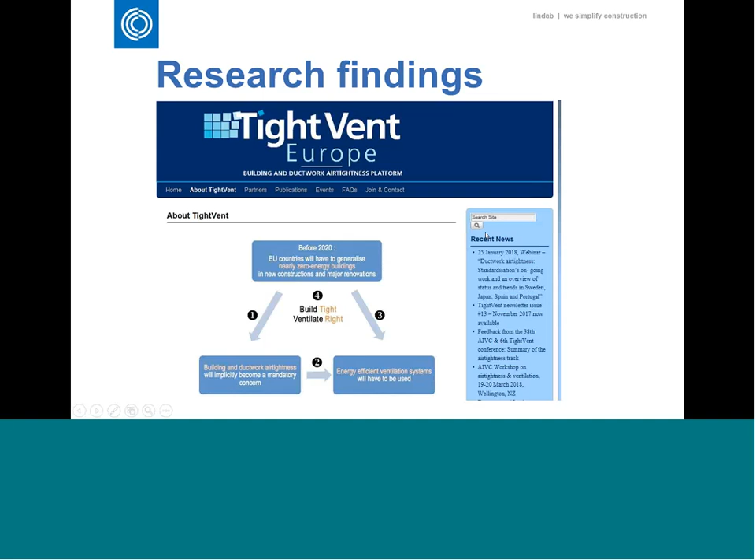Then how to ventilate right, that's a little bit more tricky, but if we go to the next part here, I am always talking about this part with a very airtight building,

and then mechanical supply and exhaust ventilation with heat recovery, so that we take in the best air available in the building, we use it, we heat it up, and then we use the energy again to heat up the new air coming in. Then we have a very good and healthy building that will work as we say it will.

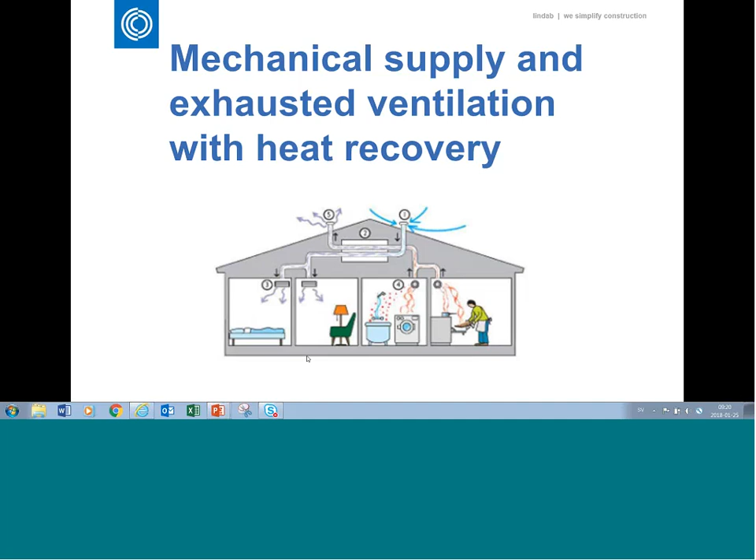So, Lars-Åke, we couldn't hear you. No, okay, I didn't say anything. Yeah, it didn't work for a while, but now it works again.

Okay, so airtightness in ventilation ducts, what is that? It starts off with this little diagram here that we have, and it's one of the crucial things for airtightness in ducts. On this part we have the system pressure. It goes from 10 Pascal to 10,000 Pascal.

It's perhaps not really relevant, but the standards go up to 2,000 Pascals, and that's what we are using. Over time, the pressure has gone down and down to low pressure systems, because we save energy in that. So the pressures are going down all the time, but this diagram works all the time.

On this other side, we have the leakage factor, that is liters per second per square meter. And that is to be able to compare different systems, which is big or which is small. So therefore we have this square meter, and the square meters, that is the area, the surface area of the duct system.

And why do we measure that? Really, I don't know, but I think it has been from the beginning when the researchers started up with this in the 1960s. They tried to find a measurement that was easy to find and also had a good impact on this. So it worked with these straight lines here that are in this diagram, and it really does.

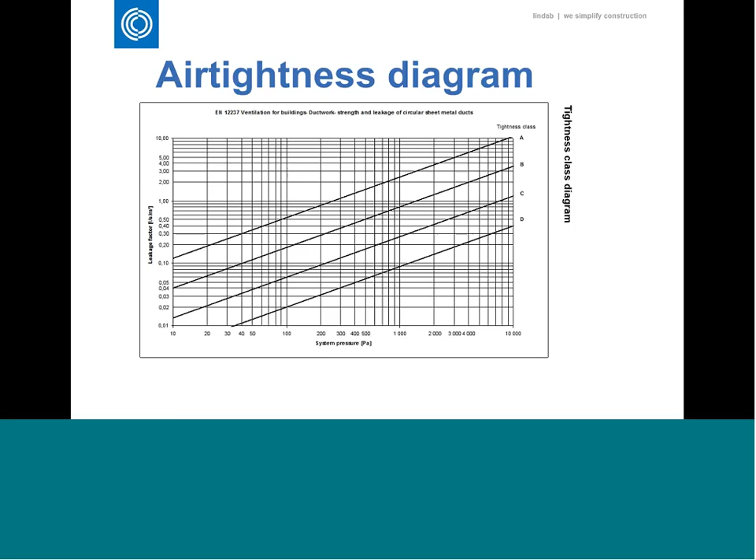To measure the surface area, there is one standard, EN 14239, surface area, that takes care of both rectangular and circular duct systems. It has been adapted so that it should be very easy to measure with a measuring tape or something like that. You measure the straight ends, going with that size to the center line of the next center, and then measure that.

You don't measure anything about the bends or around the T-pieces. But when we go to a reducer, we take the full length out to the reducer where it has changed to the next dimension, treating it as the same diameter as the other part. That is to be able to do the surface area measurement very easily.

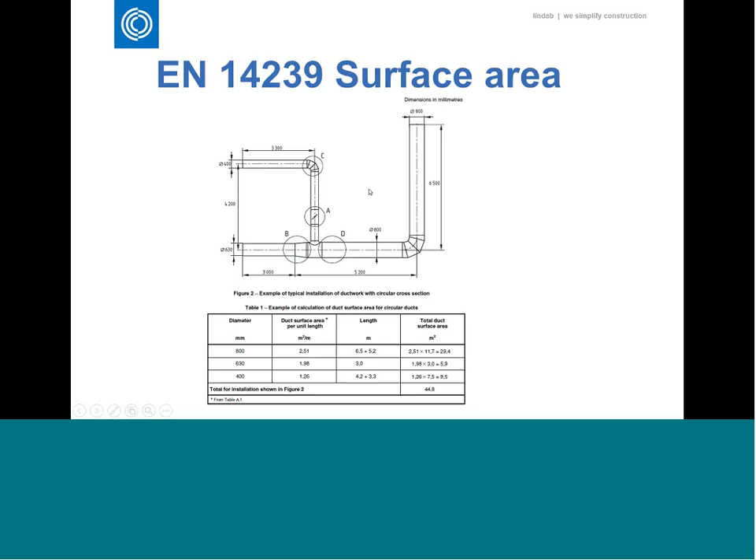How we do it in reality is we have some kind of fan. This is a very good one, a very easy one for everyone to use. You don't need to be a scientist to use this, because you put in what you want, what type of leakage class you want to achieve, and then you start blowing.

You say go up to 400 pascals - that is very common here in Sweden to test airtightness at. In other countries they test several pressures, or one pressure that they are used to, but in Sweden we have 400 pascal. You tell this machine to go to 400 pascal and it measures the flow, and you've said I want to reach tightness class C or D, and then it tells you if it's okay or not.

It blows air in through this hose, and here you can see it measures the pressure. And here you can see we have to make it airtight where we have the terminal device and so on. So we use some kind of balloons, or we have to seal it off in some way, so we don't have any leakage in this part.

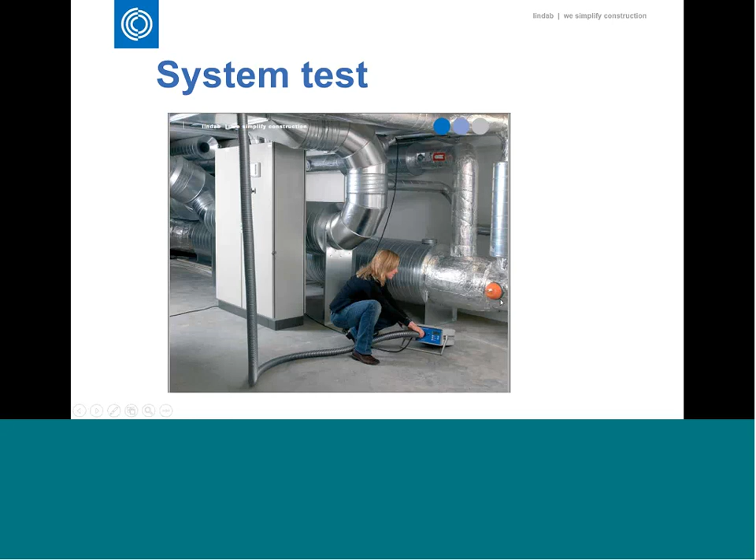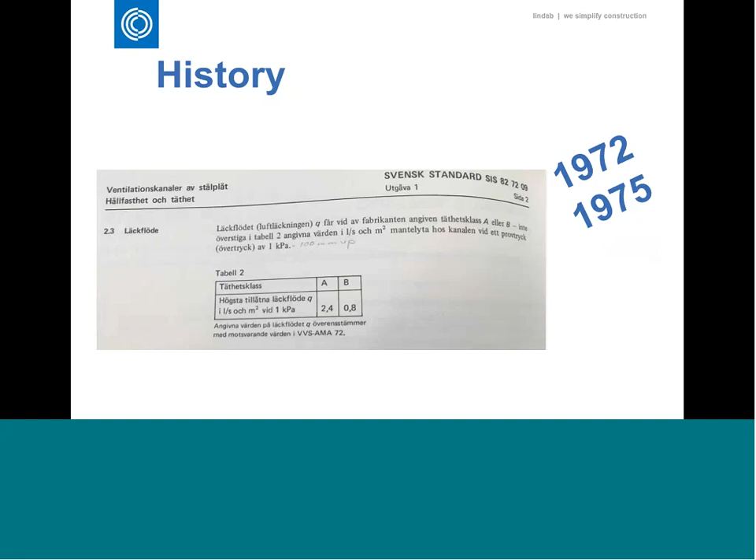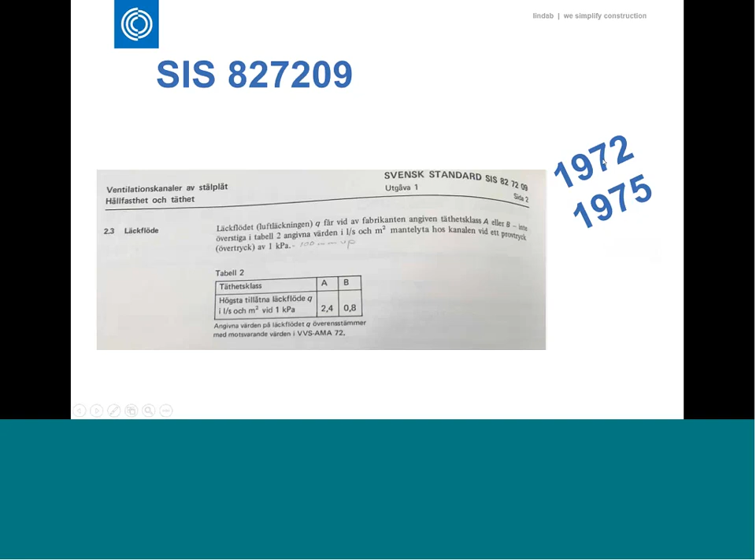As for the history, it started off in Sweden, at the university in Stockholm in the 1960s, and I saw in Valerie's presentation it was stated as 1966. I found this Swedish standard that was from 1975, and it refers to a building directive from 1972.

Then it comes into the Eurovent standards in 1981. At that time they also talked about percentage leakage. I've heard for many, many years that people want to know what percentage of leakage there is. This is very difficult to find as a figure, but in the Eurovent standard there is this percentage, and you use this diagram - but it tends to be used less and less.

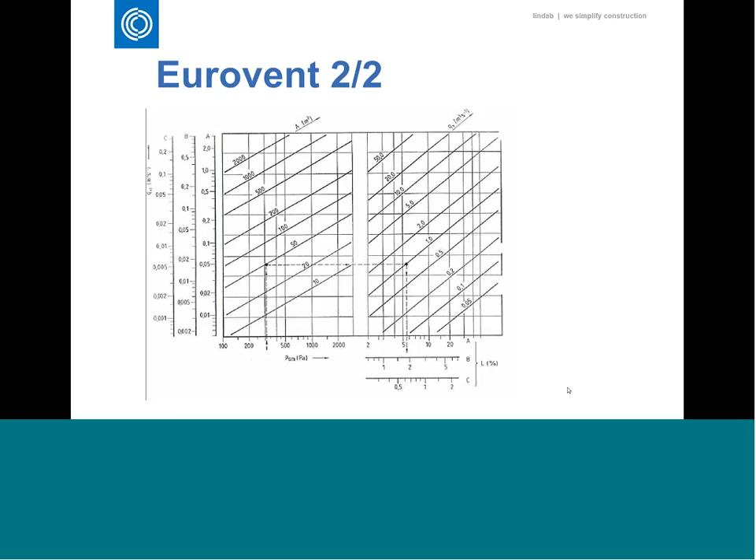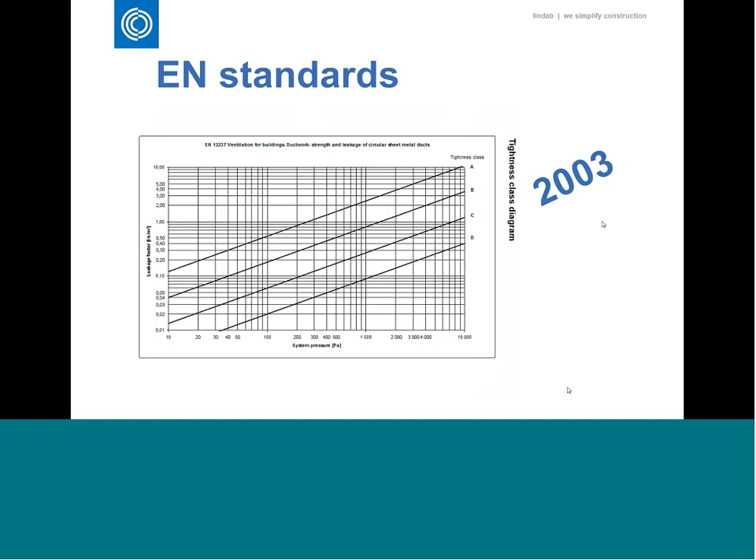So in 2003, EN 12237 became the major standard for this. That's when I started at CEN working with Airtightness Standards.

Then we have third-party certification. There's the Swedish type approval that has been there for many, many years in Sweden, and now a lot of European producers are also using this type approval, but it is a Swedish thing. Now, this year or last year, Eurovent has started their certification program called Ducts, for circular ducts, rectangular ducts, and plastic ducts. So this is now a European certification program, and I think that is really, really good for airtightness, that we can say we are certified and we really produce what we say we are producing.

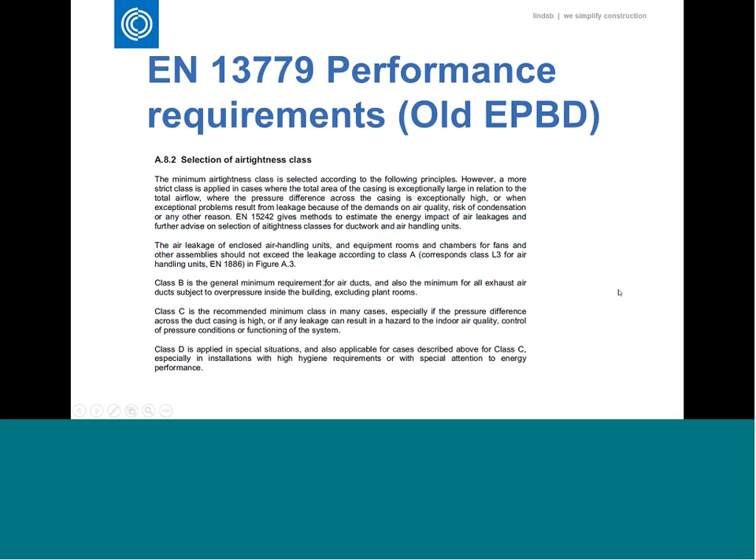Now, requirements from other standards. EN 13779 performance requirements, from the old Energy Performance in Buildings Directive, states that Class B is the general minimum requirement for air ducts, and also minimum for all exhaust air, and so on. This was a little bit unclear, and now it has been replaced by the new standard, EN 16798-3 performance requirements, from the new Energy Performance in Buildings Directive.

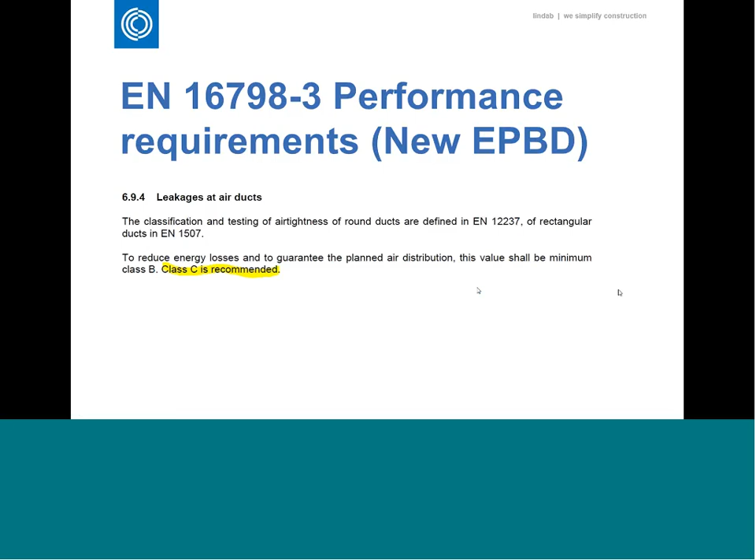Then it's very clear, and it says this value shall be minimum Class B, and Class C is recommended, and that's what I think as well, because Class C is a very good class for energy, from an energy perspective.

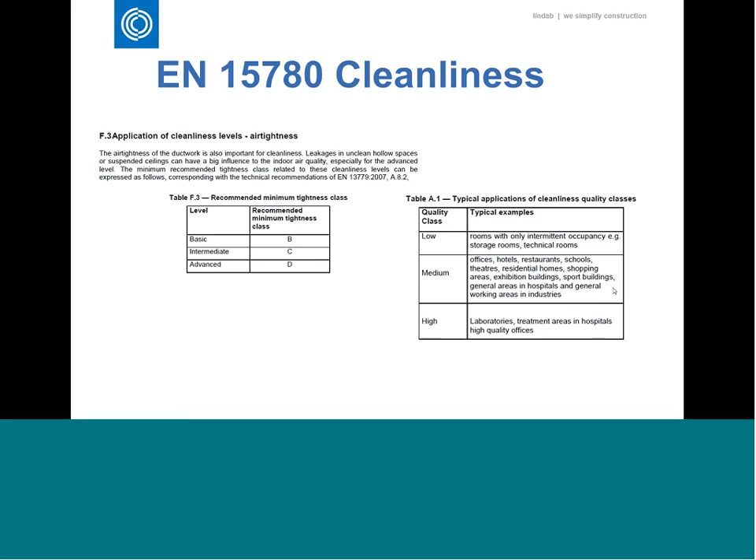If we look at another standard, EN 15780, the Cleanliness Standard, we see minimum tightness classes from basic level Class B, intermediate Class C, and advanced Class D. This standard shows a typical example of rooms: low is intermittent occupancy, medium is like hotels, restaurants, schools. Normal buildings should have medium and intermediate, Class C. High is laboratory treatments, hospitals, and so on, and we see a lot of hospitals in advanced systems with Class D. I think this reflects a very good way of using the airtightness classes.

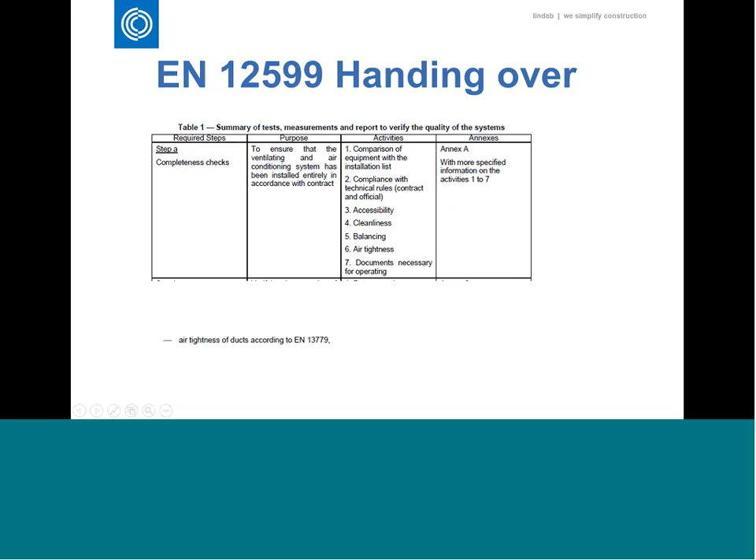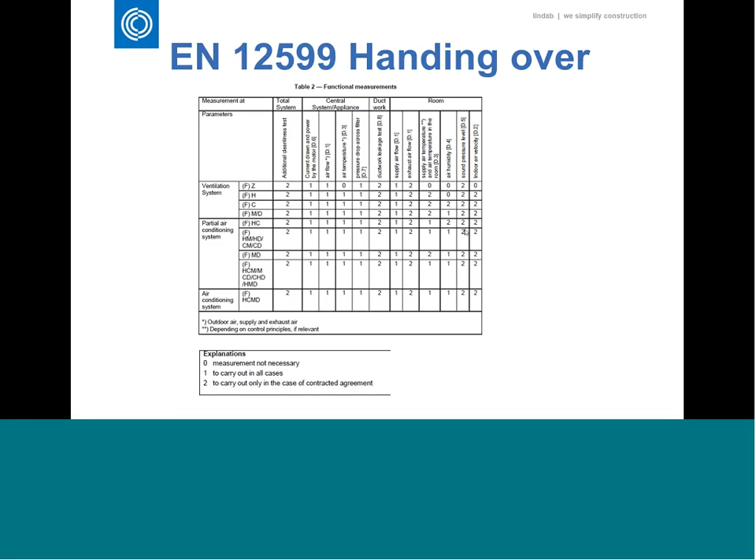In the 12599 handing over standard, it also reflects airtightness in the completeness checks. If we look at the next page, we can see that the ductwork leakage test has to be carried out only in the case of a contractual agreement. I think that is happening more and more now in all the countries talking about saving energy, but it's not a law. I don't think it's a law anywhere more than in Portugal.

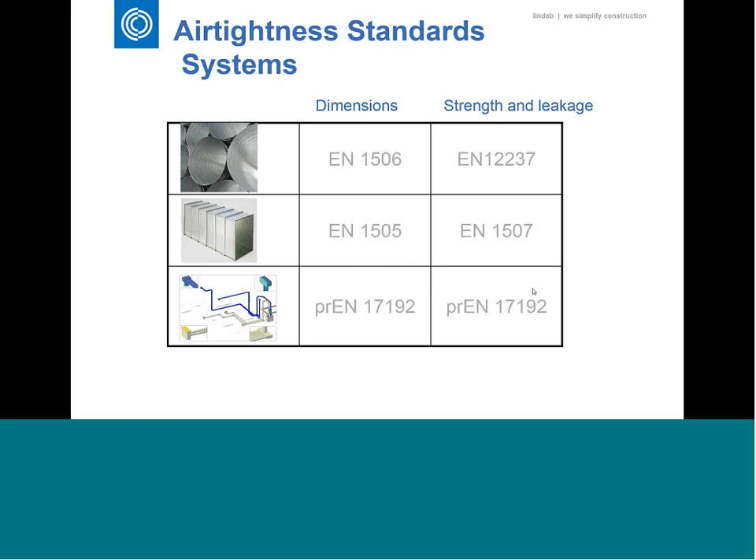So what is the difference between them? It's mostly this L/A ratio, because for metal duct it has been tested and shown that the L/A ratio is between 1 and 1.5, which is when you have a normal amount of products, because the leakage is normally between the products and the ducts, in the joints. If we have 1 and 1.5, then we have a normal system. If we have a system with many products, then we are way above that, and perhaps we can have more leakage.

Normal systems tend to go upwards towards 1.5, but I don't see them going over 1.5 at the moment. In the new standard for plastic ductwork, semi-rigid ductwork, the L/A ratio should be between 0.4 and 0.6 per meter. So they are much smaller because they have longer ducts and smaller ducts.

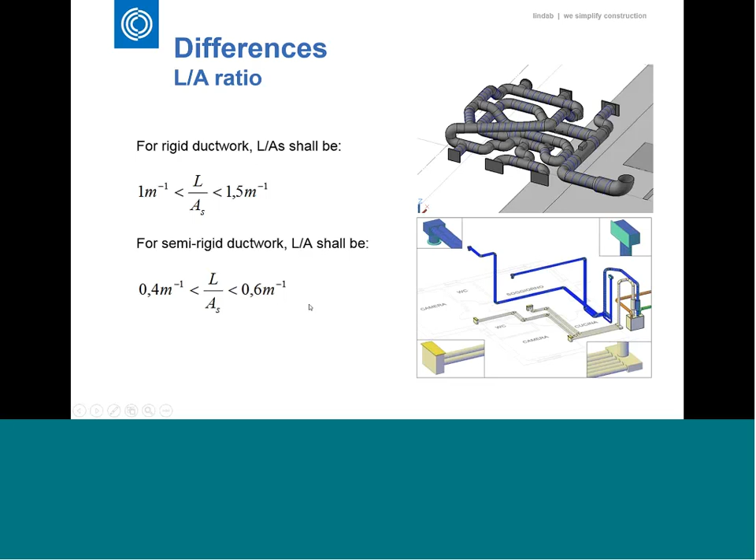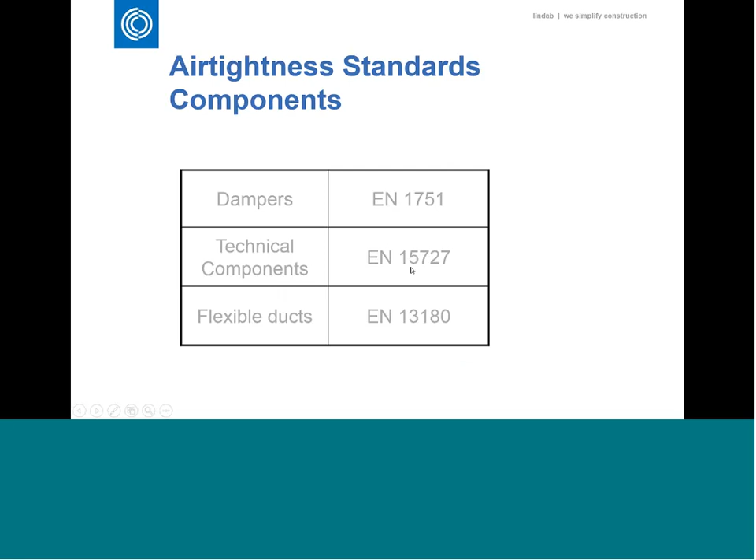Then we have airtightness standards on components. For dampers we have 1751, technical components 15727, and flexible ducts 13180. These two are very similar because they do the area calculation in the same way. Since they don't have an area of their own, it's very difficult to use them, so we have to create an area, and that's done by using its own area or by putting on a duct that is 1 meter long.

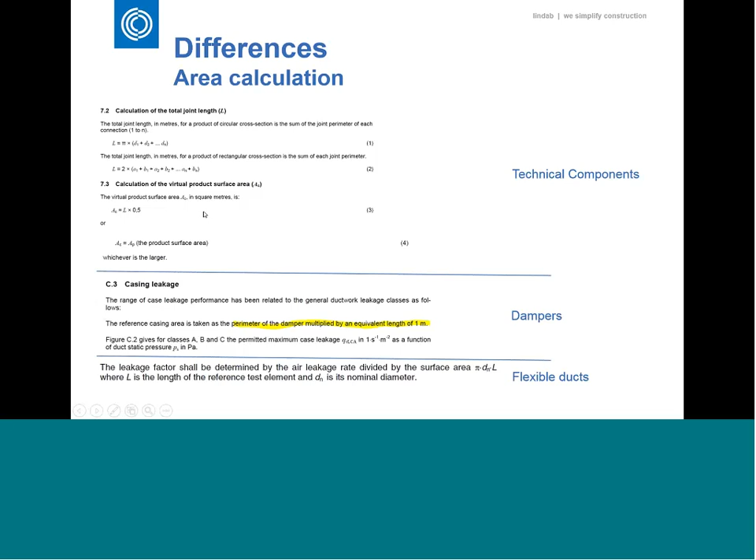That is for dampers. For a technical component it's the same thing, a 1 meter long duct, but a technical component can have 1, 2, or 3, or a lot of branches. So we put ducts on each branch, 1 meter long each. For flexible ducts we use the real area. So if we have a product looking like this, we can have a 0.5 meter duct on this side and a 0.5 meter duct on this side. On this product, we need to have 3 ducts, so there will be 33 centimeters on each side.

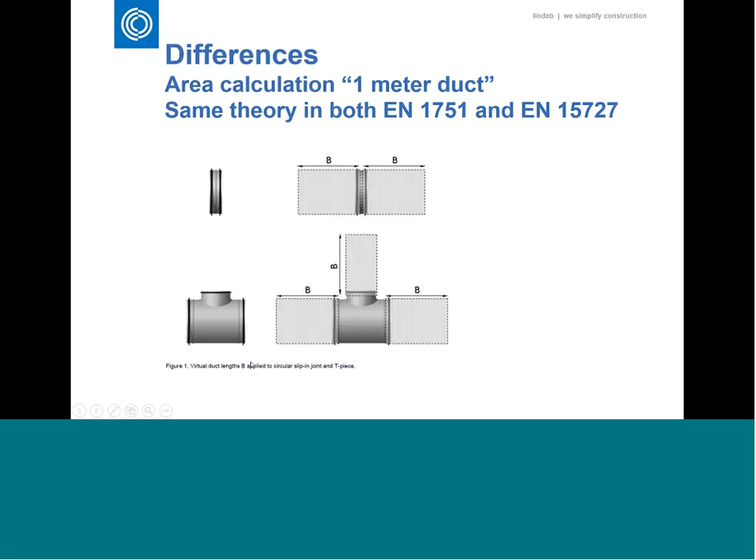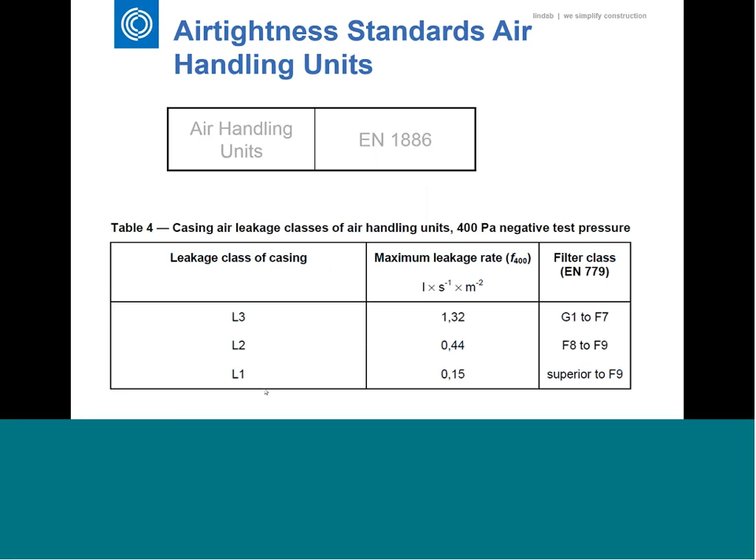For airtightness standards for air handling units, we have EN 1886, and that is also a different standard that you have to read to find out how to measure, with different leakage classes L3 to L1 instead of A, B, C, and D.

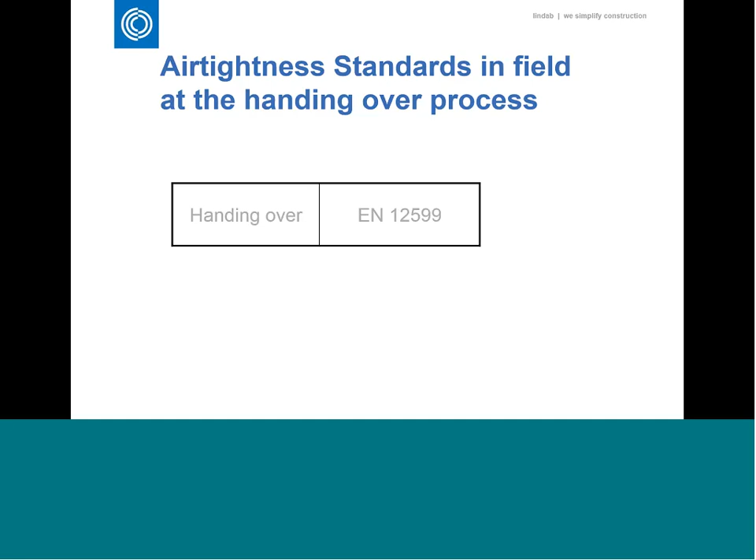And then we have the handing over standard 12599, and the difference is it's the same standard, but it has different pressures, because then they speak about the pressures in the real building.

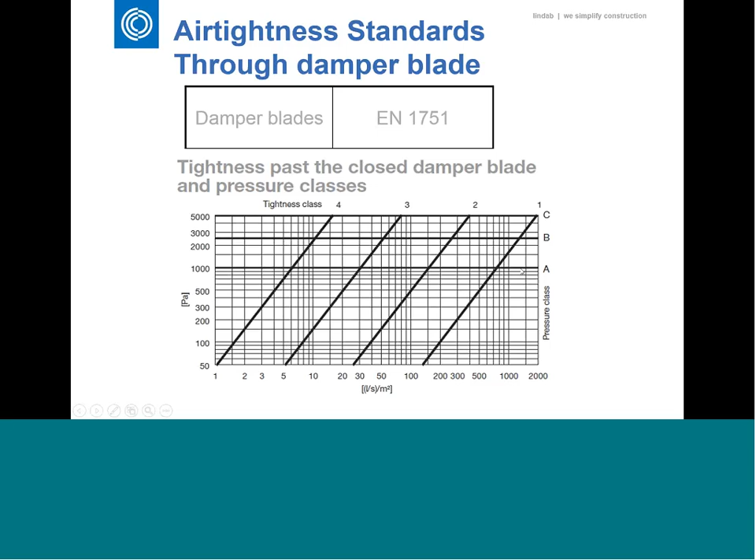Next is airtightness through damper blade standard, which can be a little confusing because they're talking about the same thing and it has a diagram that looks similar. It comes from EN 1751, and it has tightness classes 1, 2, 3, and 4 for air tightness through the blade, not through to the environment as the other ones. But then it has pressure classes A, B, and C. So we can say our product is good enough for tightness class 1 up to a pressure of 1000 Pascal, or up to 2500 or something like that.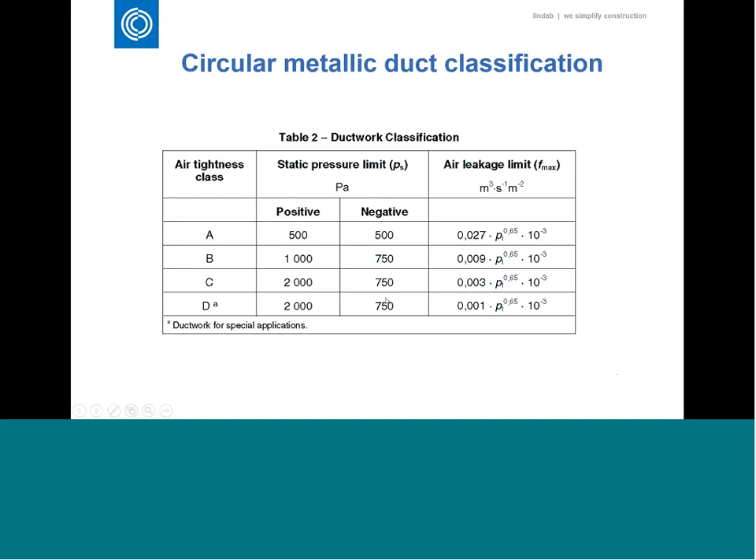So the pressure classification is also different between the different systems. It's 500 to 500 here for positive and negative, up to 2000 to 750, and that is for circular metallic ducts. For rectangular ducts it's different, and we can choose the pressure class we want to go to. A really stiff system could go up to 2000 Pascal, or another system can go up to 400.

And this is because we need to focus also on the costs of the duct. So if you don't need a system that can withstand more than 400 Pascals, you should be able to produce an airtight system up to 400 Pascal. So that is a cost issue.

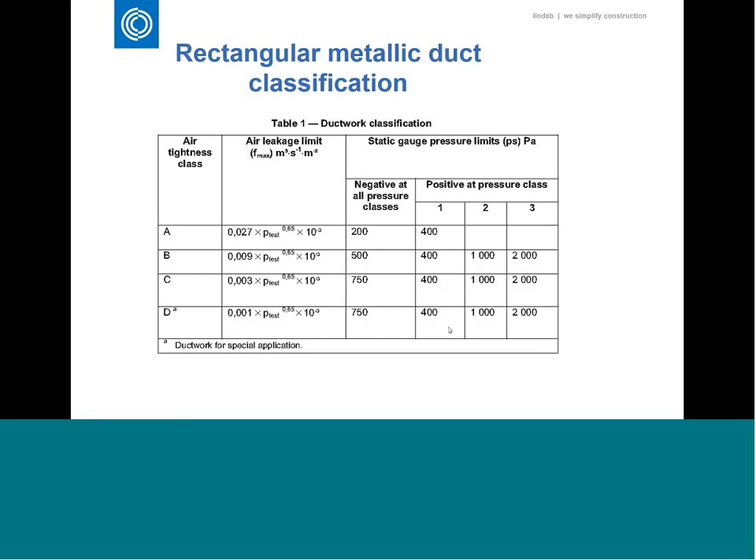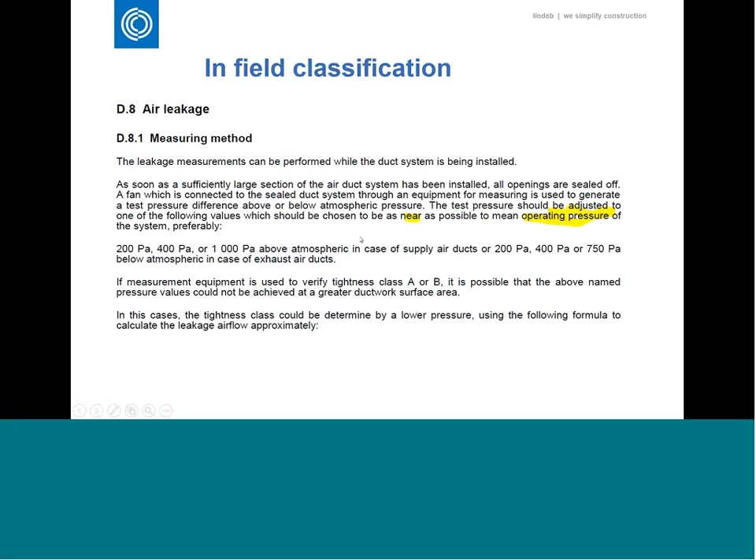And here we have this 12599 standard, and here we say that we should be as near to the operating pressure as possible, but we should keep to these clear figures that are here.

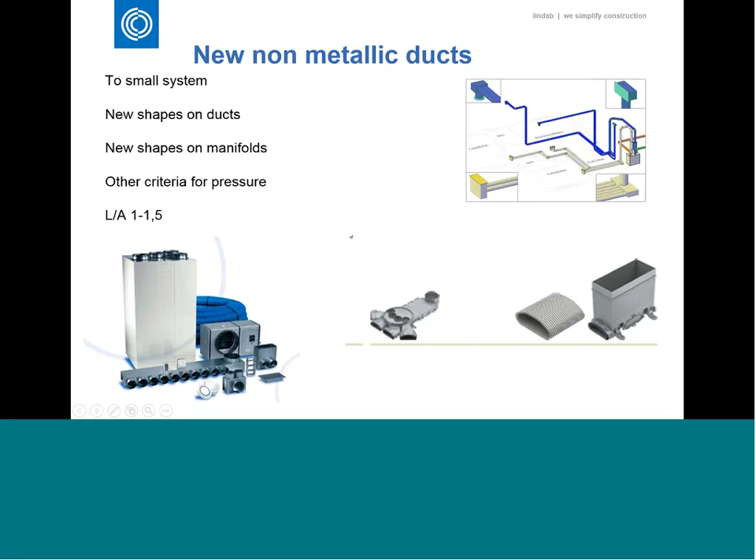And then we have the new standards for non-metallic ducts, and this has been a big job that we've done in our group. The biggest problem has been that this is much smaller than what we are used to. It has new shapes on the manifolds and other criteria for pressure. Also this L/A ratio has been an issue. So we have said it should be at least 10 square meters like the others, for the whole system. So that is a new thing we have introduced.

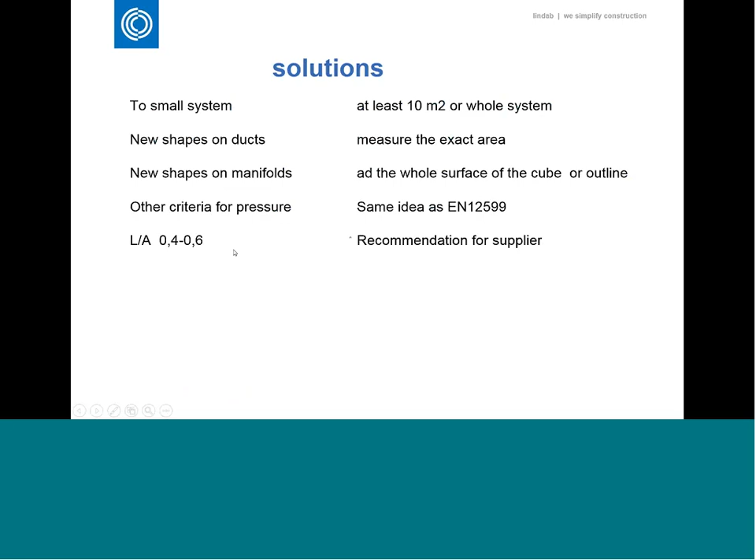The new shape on the ducts has to be measured for the exact area, so it's a little more difficult to measure. For new shapes on manifolds, we should measure the whole surface of the cube or outline. And then we have the same criteria as for 12599 to measure the pressures it's supposed to be used at. The L/A ratio is 0.4 to 0.6, and that's what the supplier has recommended.

For the US standards, we can see that they also work with the same thing. Our tightness class C is here, and it's their class 2.1. So they have exactly the same thing that we have, but only adapted to their units.

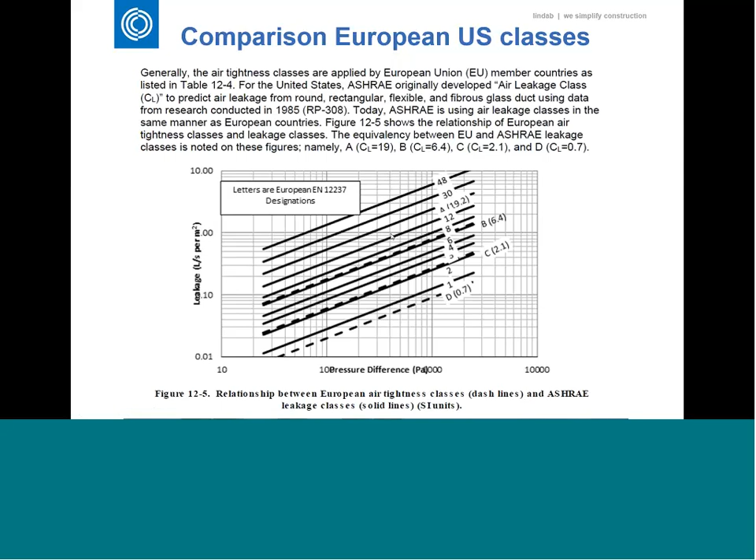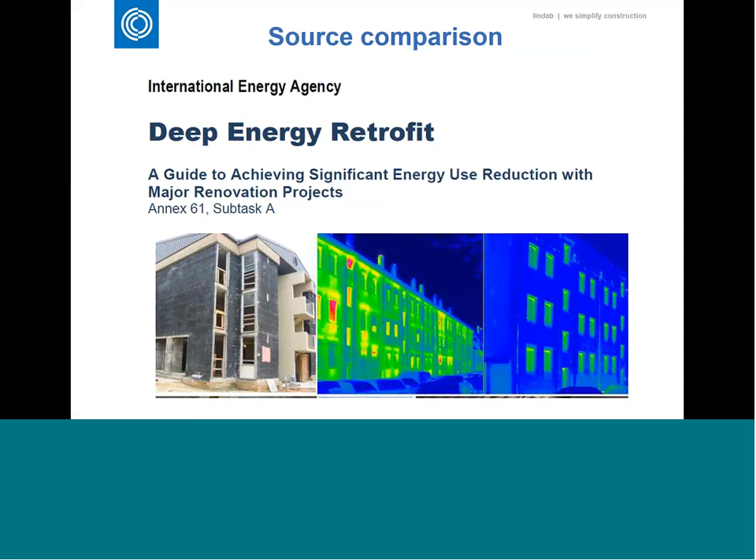If we look at source comparisons, the International Energy Agency has made a very big effort to guide people and countries on how to do deep energy retrofitting for buildings. This is Annex 61, and there they also talk a lot about airtightness. So please read that and see what findings they have.

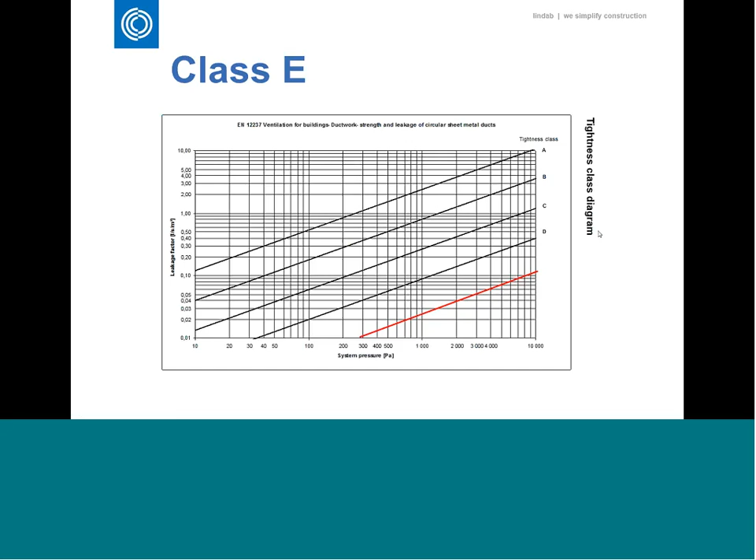Also, there is a new class here, class E, introduced in Sweden, but I don't think it will be used very much. My view is there's no demand from an energy perspective to go to class E. We have a wet cleaning demand, a problem with grease drips in factory processing, and smell from garbage ventilation with overpressure. I wouldn't solve these two by using class E, but by airtight or downpipe principle, so that grease or wet things don't come out of the system. And the smell issue should be solved by using negative pressure instead.